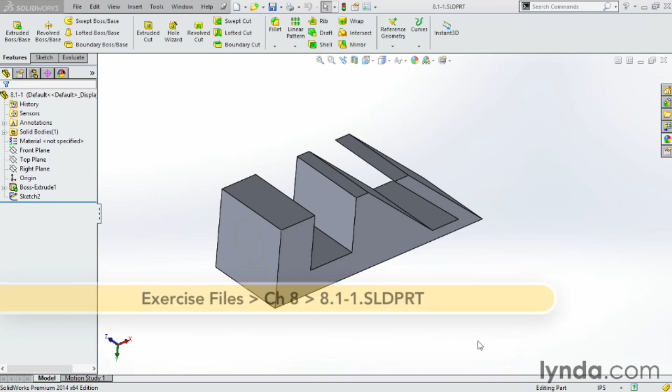Let's start by selecting a face and drawing a simple sketch. I've already done this by choosing this face here, and I've got sketch 2 placed on that face. Go ahead and edit that sketch and take a look at what we have. You can see I've got a 1.5 inch circle, 1.75 from the origin on center. Go ahead and exit out of that.

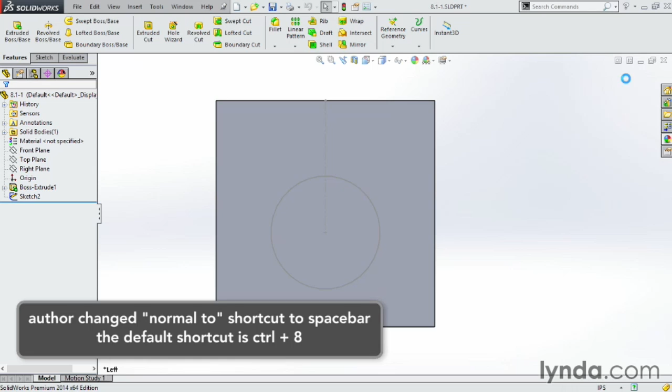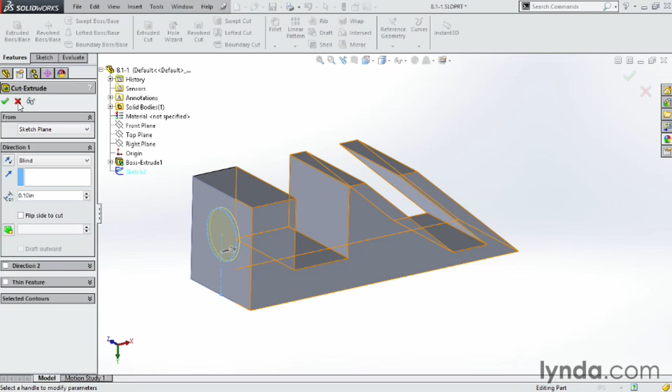Now what you can see is we're going to be cutting through this part here in multiple different ways. So let's go up here under features, go to extruded cut, and if you don't already have a face selected, we can choose that sketch right there first. Automatically, as soon as I choose that, it highlights here. The other option is if you already have that sketch selected, or you're already in that sketch, you can jump right into that feature and it automatically turns it on.

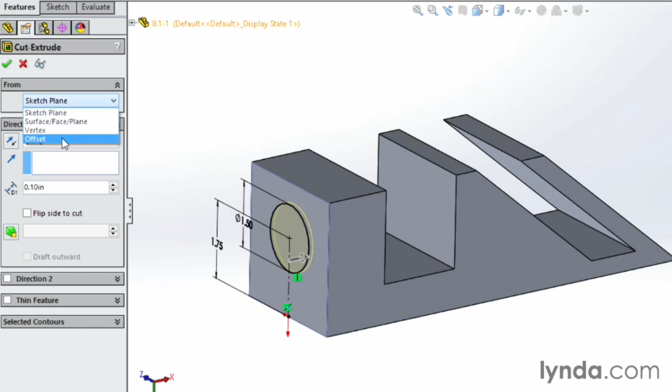Next, take a look at some of the options. One is up here at the very top, we're starting from the sketch plane. We also have the option to choose a surface, a face or plane, a vertex, or an offset. In this case, if I was to choose an offset, I could then type in a value and change the direction. I could actually start inside of that face if I wanted to give you an example.

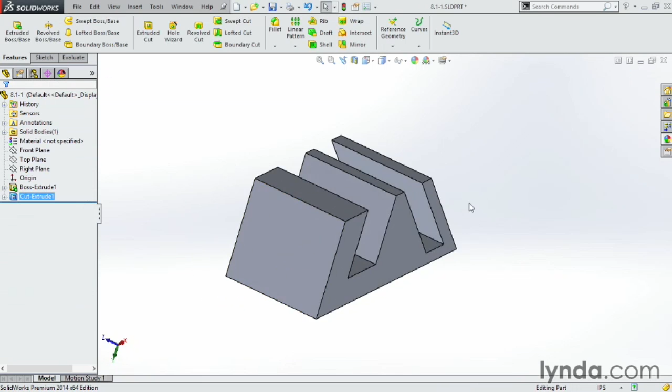Take a look at the blind, and I'm going to make that a little deeper so you can see it actually pops through, at least on the other side here. It's a fixed value of 1.5, and we're offset by 0.4. Let's try it out, click OK. You can see there's actually nothing cut here because we offset from that surface. But if you spin it around, you can see we actually have this circle or cylinder cut on the inside of that face, 0.4 from that original starting face. So that's an example of offset.

Let's go back to that feature now. Let's turn that off, so we're starting right at the sketch face, and take a look at it again. This time we're starting here, so it goes all the way through. This is an example of a blind cut. You type in the value of exactly 1.5, and it cuts exactly that far.

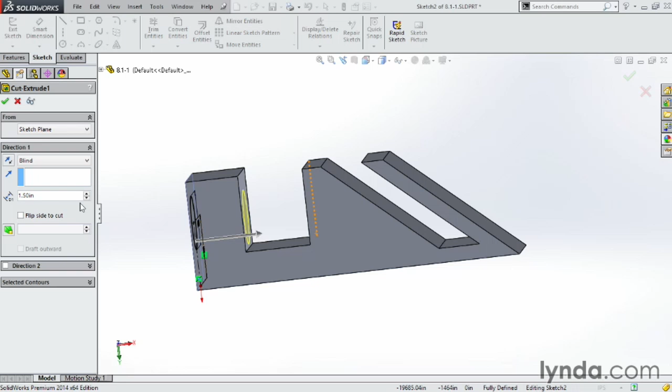You can extend that even further if you'd like. In fact, you can even extend it up into that next piece. If you click OK, you can see it cut all the way through the first piece and all the way up into the next one by whatever value you type in for that blind cut.

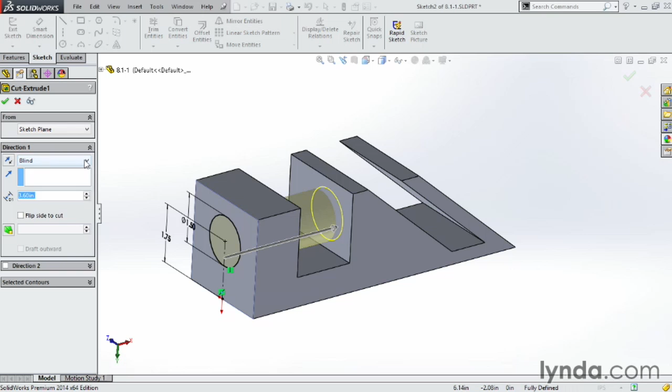Next, let's go back again to the feature and take a look at some of the other options. Instead of blind, let's click on through all. Through all will automatically make this go the full extent of the part. Notice it goes all the way down here to the very tip of the part. Click OK, and it'll automatically go through the entire part, no matter how long it is. If you adjust the part later to be longer, it'll still continuously go through the entire part.

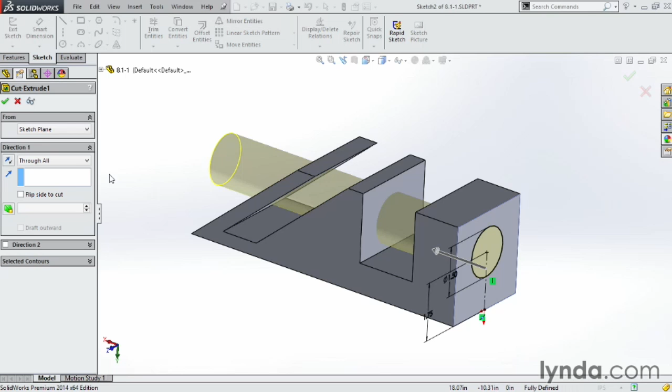Go back again, take a look at some of the other options. Instead of through all, let's go up to next. Up to next will find the next face that it can find that will fully close off that shape. In this case, because it's a 1.5 diameter circle, we got to make sure that this face would completely close it off, which it does, and it stops right there.

If we were later to modify this part here and make this face a little further away, it would still always go up to that next face.

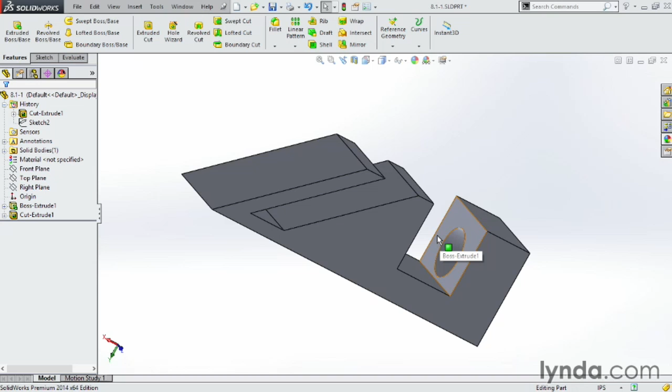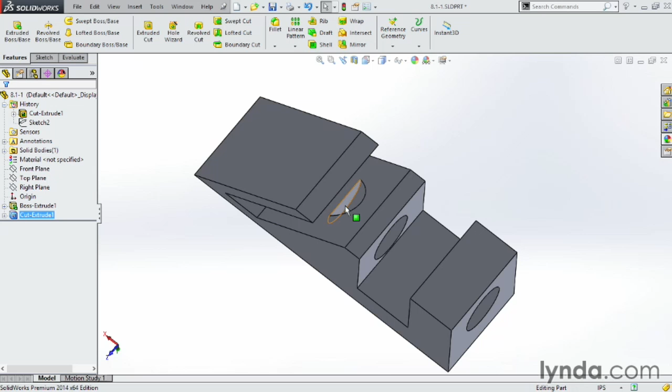Again, go back to the cut feature, go to edit feature, and take a look at some of these other options. Up to vertex cuts up to a point. Maybe I can choose this point here, right there, and you can see it cuts all the way up to that point. That'll give us a little bit of a funny shape up here, but we'll try it anyways. So you can see I'm actually only cutting up to that point, so I'm only getting half the cut through on that one face. But in some cases, you might want to be using that in your design.

Instead of up to vertex, how about up to surface? In this case here, I could choose, well, maybe I want to be right up to that surface there. In that case, it would cut and go all the way through.

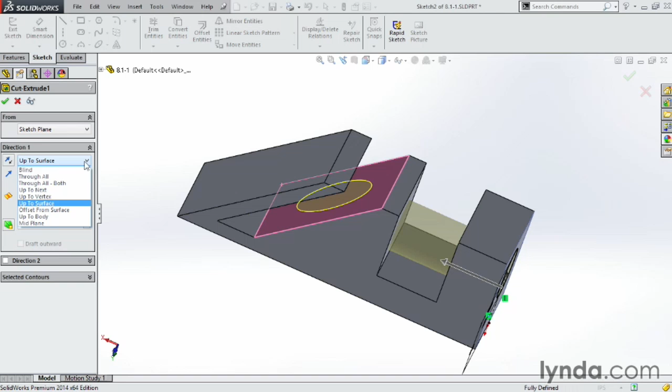Looks good. Or what I could do is offset from surface, which is the next one, and I can offset it a certain amount. Maybe I'll offset 0.25. Click there, make sure I'm saying offset from surface, choose the surface. You can see that actually it's going to cut on the inside of that.

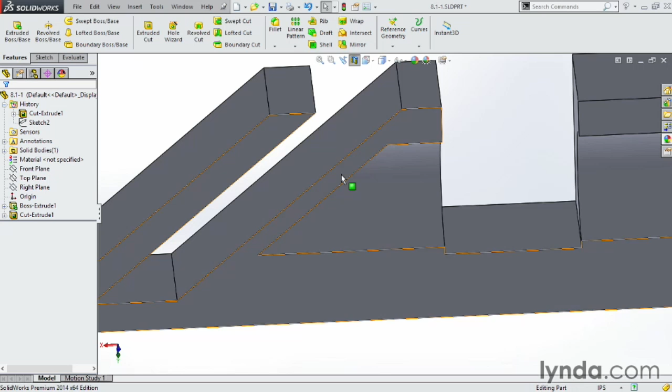Click OK. It's a little bit hard to see, so let's go ahead and use the section tool. We'll cut that thing right in half and take a look. So you can see it's using this surface as the driver, and it's offsetting by a quarter inch to finish that cut feature. Go ahead and turn off section view, come back, and let's just look at a couple other ones.

Up to body really doesn't work in this case here because we only have one body, but if there's a secondary body in your design, you could cut up to that one. And then the final one here is mid-plane, which will allow you to cut both directions. In this case here, that wouldn't really do much because we only have material in one of these directions. But if you did have some extra material over here, you'd be cutting into that as well.

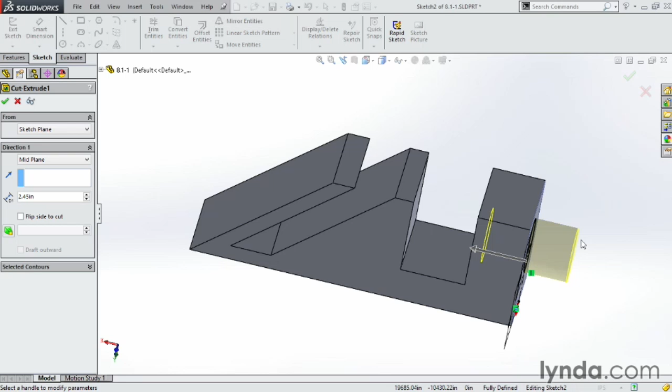However, if you were drawing maybe on this face or this face, then that would make sense because you could cut in this direction or that direction using the mid-plane cut.

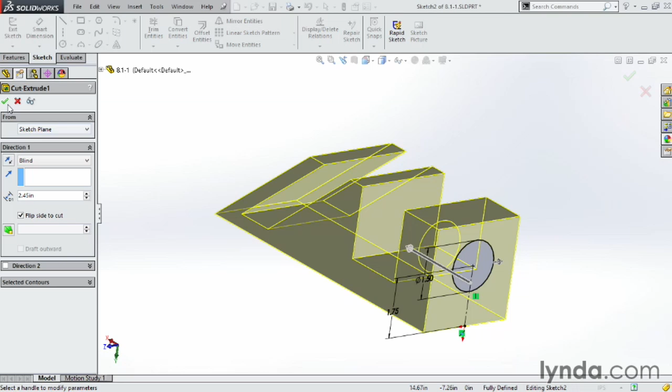Besides our basic cuts, if I go back to the blind feature, obviously I can type in a value. I also have the flip side to cut, so I can put it on the other side. So in this case here, anything that's not in that feature would be cut away. So click OK, and it's just going to give you this cylinder. So click OK, and it's going to remove all that extra material.

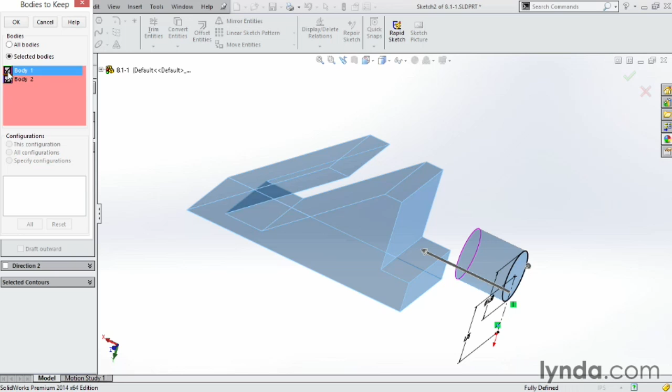Go back. Same thing as when you do a flip side to cut. Again, it'll ask you which bodies you want, and you can select the bodies. Say, well, I just want this body here, or maybe that body there, but just by choosing the bodies you want to keep. And if you don't want to keep one of them, you can turn it off, and it just leaves the remaining body.

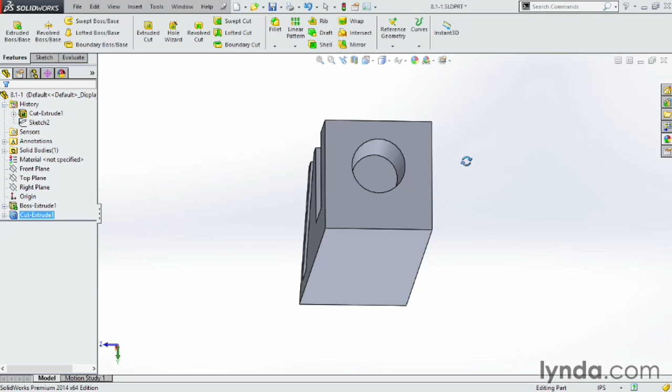So pretty handy. Go back again to the feature. In this case here, I'm going to turn that off. And you can also add draft. So if you're using molding tools or something like that, and you're going to mold this part later, you might want to add a few degrees of draft to make your part moldable. Click OK, and now you can see that's a tapered hole or a tapered cylinder.

Much like the extrude command, the extruded cut is straightforward and easy to use. It's one of the most used commands, and there's a variety pack of options that make this feature extremely powerful.